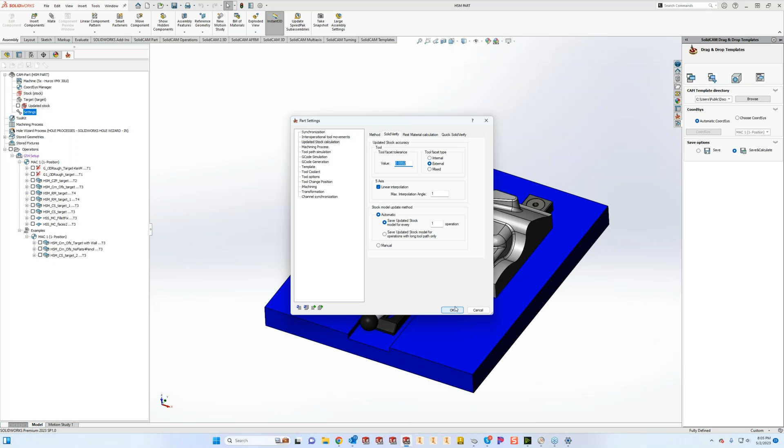In our settings here, if I go to our updated stock calculation, this is where the real crunching happens, especially when we come into our solid verify. Right now we're running a 2/10 tolerance on our solid verification. If we just kind of step through our program, we're doing a 3D iMachining, another 3D iMachining to do rest material, HSM toolpath. As we get going further in here, this really clamps down on your average system.

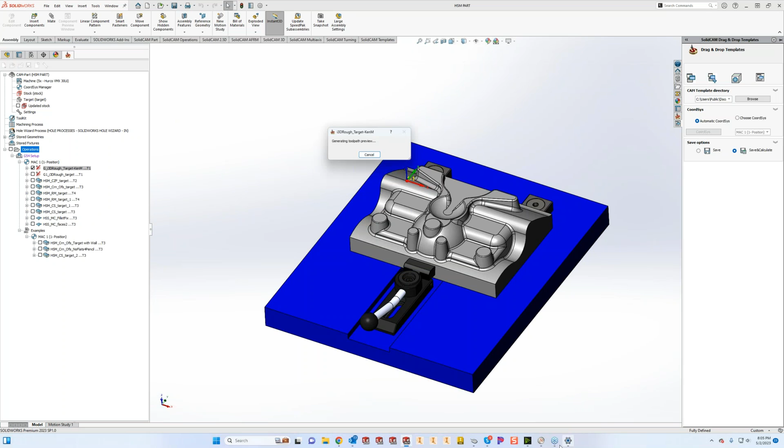So let's take a look and do a simulate real quick. Actually, we're going to do a calculate and synchronize. So we'll come here, we'll do a synchronize and calculate all. This is basically going through and rebuilding the entire structure of this part, as well as the toolpath that's going on here. So right now, if we go ahead and look at our task manager, we have a lot of cores here.

I am also running this BOXX computer right now. Brad, how many cores are we actually running on the system? There's up to 24 cores on it, however some of them are E cores and some of them are P cores. Okay, excellent, excellent. And did we get Aaron in yet? No, I don't see him in yet.

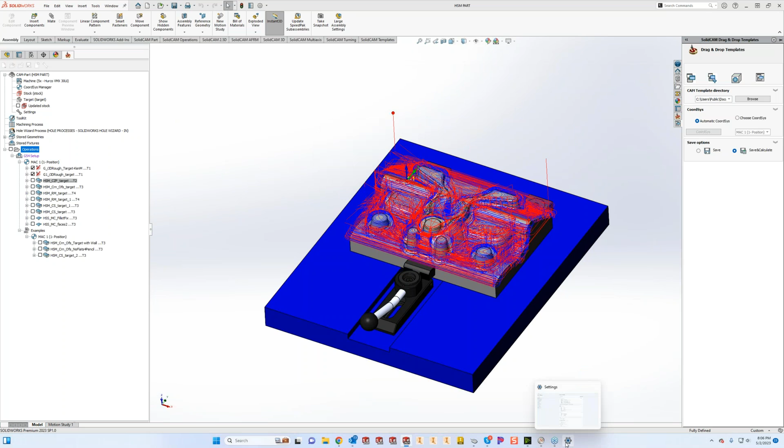So what you guys can see right now is we are doing a full-on calculation. If I just minimize this real quick, you can see we're still calculating right here, utilizing all of the cores of this BOXX computer.

So we can see every single one of our cores is being used in one way or another. This really helps out those calculation times.

So we're going right now. Shoot, I forgot to start the clock. But I've done some testing on this part file, and we're going to be at this part at about 2 minutes and 12 seconds. So to recap, we went from a 12-minute calculation time, well, let's say 13-minute, down to a 2-minute calculation time.

This is huge. So, Brad, can you tell us what the computer that I have sitting underneath my desk looks like compared to every other computer out there? What really makes BOXX Technologies really pop?

Well, we always use the latest and greatest hardware, and the companies that supply us, such as Intel, grow by leaps and bounds every generation. Just 1 gigahertz can result in a 25% performance improvement on average on SolidWorks and SolidCAM. So because you're using the absolute latest and greatest, you're going to get a performance improvement.

Further to that, we use performance tuning, which means a liquid cooling solution, and it's closed loop, so you don't have to worry about leaks or other problems. So we actually run this at 6 gigahertz, even though the top of what Intel offers is 5.8.

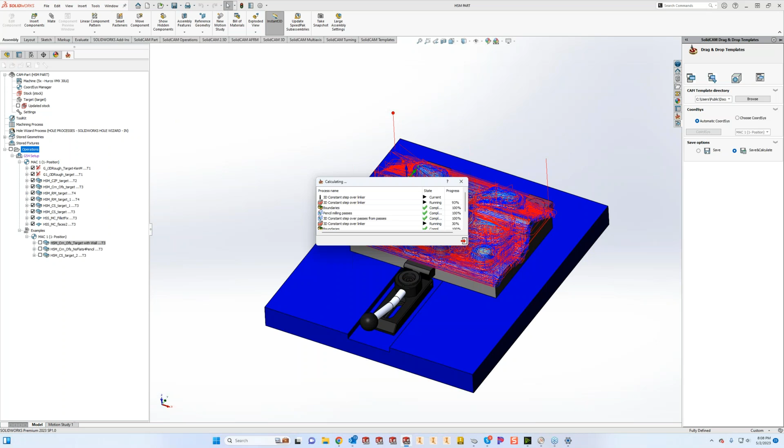Excellent. So for those of you guys that are live right now, do you guys want to see more of the inner workings of the computer and how they're able to process and get these speeds? Or are we getting too nerded out?

Okay, so I got some people saying yes. So let's do this. Brad, I'm going to switch over to you. If you could show us a little bit more of the inner workings and maybe a little overview of BOXX Technologies, and then we'll get back into the CAM side of things for you guys as well on the computer. So go ahead and make yourself presenter.

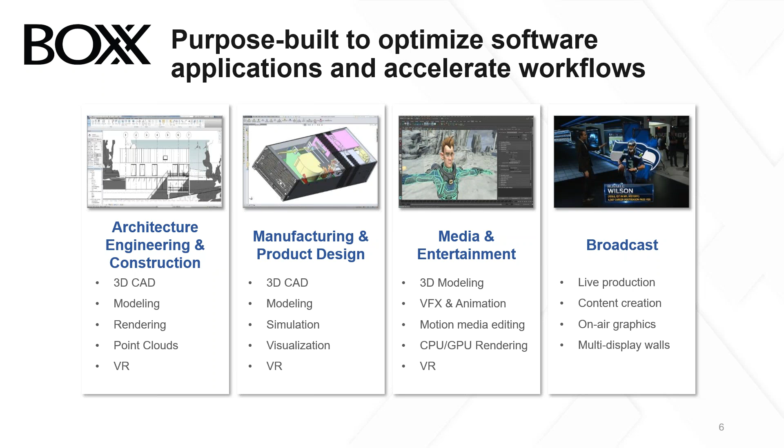Awesome. And what we're kind of looking at here too, if I can dumb it down to my level, is we see 6.0 gigahertz. Now, if you guys go out and try to find a Dell or an HP, you're not going to find that anywhere. Think about 6.0 gigahertz as your horsepower.

Your most common machine out there is what, 3.8 to 4 gigahertz currently? That seems to be probably on average where things are at.

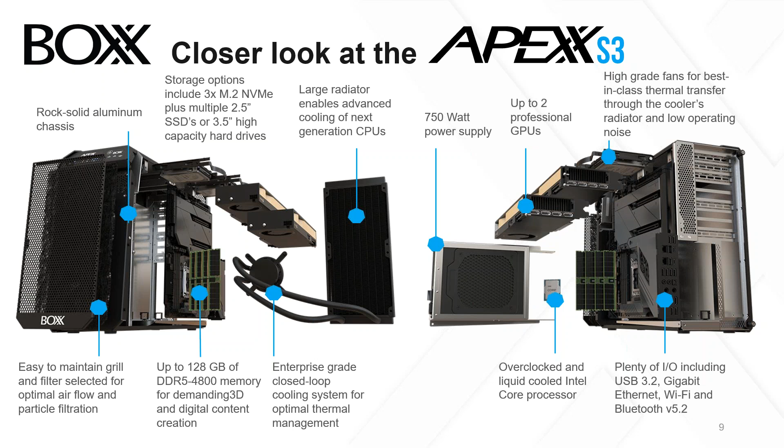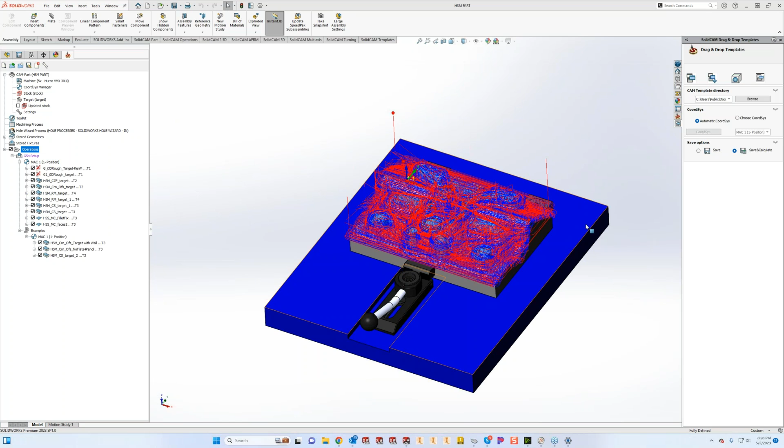Like we were talking about the calculations and times, if you're running your basic 2.5D pocket profile stuff like that, the calculations are so fast already, you're not going to notice the time difference.

But as soon as we start getting into any of the 3D features of the CAM, not saying SolidCAM 3D features is very invasive of your computer, but now with a much faster computer that we're pushing, SolidCAM is putting this BOXX computer through its paces in every way.

Now all these 3D operations are instant calculations, where we were waiting 5 to 10 minutes, and on this particular part we're waiting 12 minutes versus 2 minutes.

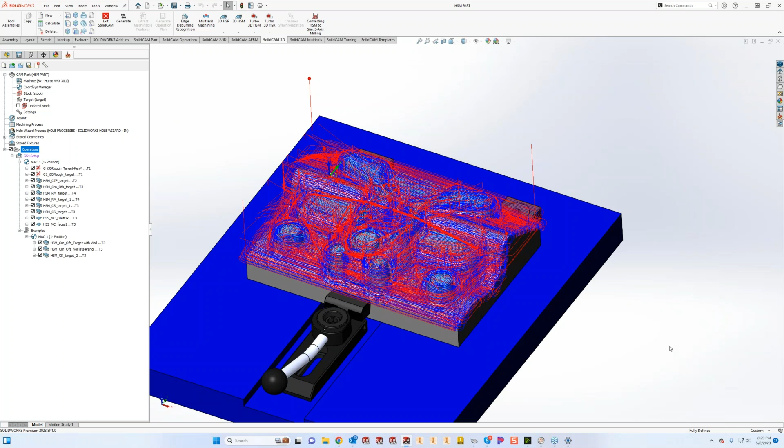In my mind, that's huge, and I will gladly send this part to anybody else, and if we want, we can do a stopwatch video too, so we can just prove to you guys that it really was 2 minutes.

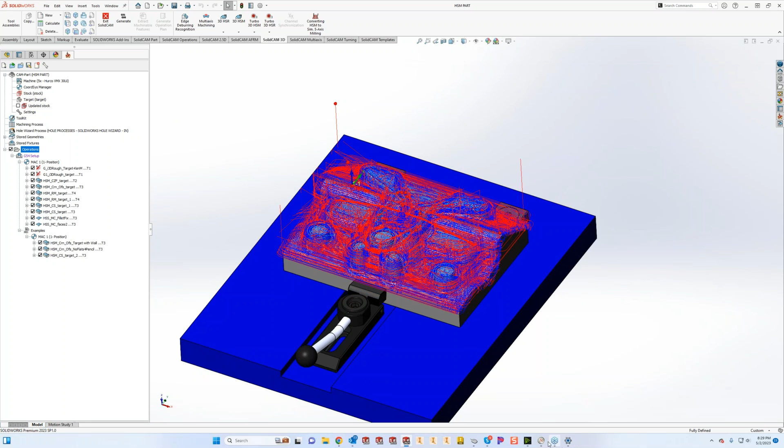But just this part alone definitely crunches away, and we're utilizing all of our processors, utilizing the full computer capabilities, where if we talk about other CAM software out there, SolidCAM is the only one that can utilize multi-core threading, where all the other ones out there are only using single core threading. So only one of these cores would be pinging to the max there.

Now Brad, can you tell us, so we're saying extreme here, but where are we actually at with this current computer? Well, the current one actually goes above Intel's spec. We're actually clocking at 6 gigahertz, where it maxes out at 5.8. So let's just call it extra extreme, it would be an accurate thing for us on this one. And then with the NVIDIA card?